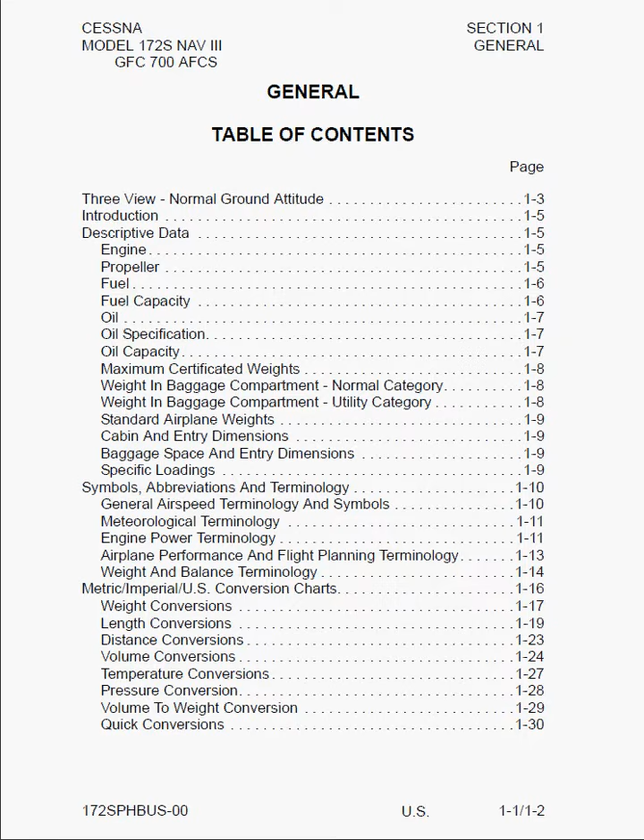Next we've got the 3-view drawing of the aircraft and some important footnotes on items like the wing area, ground clearance of the propeller, wheelbase, etc.

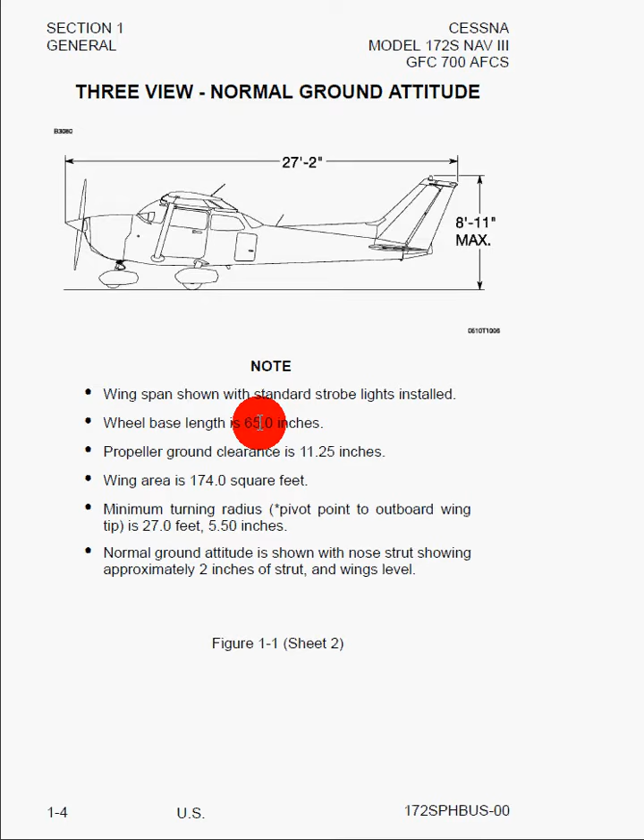Here we've got the introduction, which basically gives an overview that the POH is going to contain 9 sections, and that Section 1 is going to have definitions, explanation of symbols, abbreviations, and terminology that will be commonly used throughout the rest of this Pilot's Operating Handbook.

We can start with the engine, and it tells us that we've got obviously one engine. It's an IO 360 L2A, and it's 360 cubic inches, hence the 360. Normally aspirated, direct drive, which means the propeller bolts right onto the drive shaft of the engine. It's air-cooled, which is why we have those air intakes on the front cowling, horizontally opposed so that the cylinders lie flat and opposite from each other.

Fuel injected, and 4 cylinders. Horsepower rating and engine speed is 180 brake horsepower at 2,700 RPM, and that's based at sea level.

Here we have information on the propeller, and number of blades are 2, and it's fixed pitch.

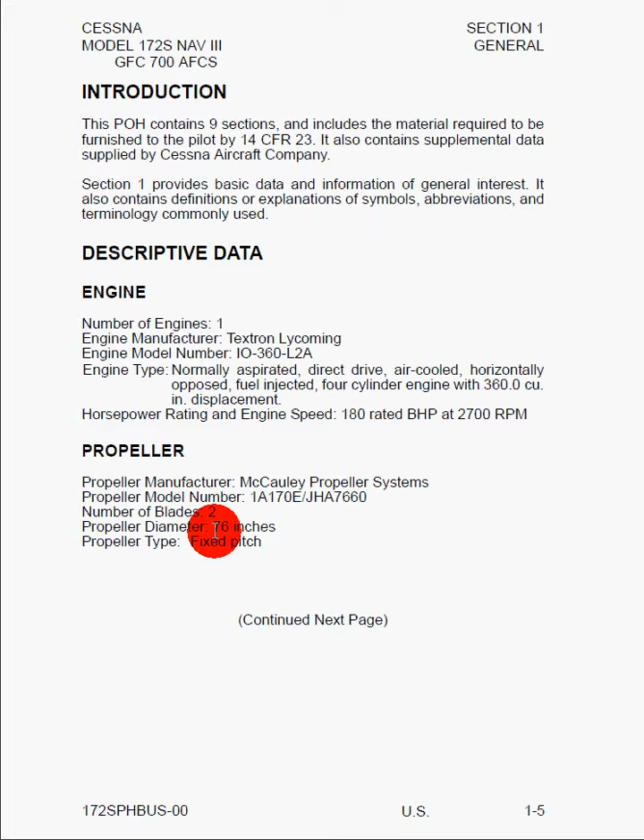Here we've got information on the fuel system, and it says use of unapproved fuels may result in damage to the engine and fuel system components, resulting in possible engine failure. So what you can use is 100 low lead, which is blue, and 100, which is green.

And then here's a little note if you want to put additives in fuel, and then also the fuel capacity, which is 56 gallons total. 53 of those are usable, and 28 per tank, 26.5 gallons per tank usable.

And a note here that when you're fueling, to get maximum fuel capacity and to minimize cross-feeding when you're refueling, always park the airplane wings level with a normal ground attitude so that the nose of the aircraft is not pointed too high or too low, and place the fuel selector valve in the left or right position, not both, and that will allow for optimal refueling of the aircraft.

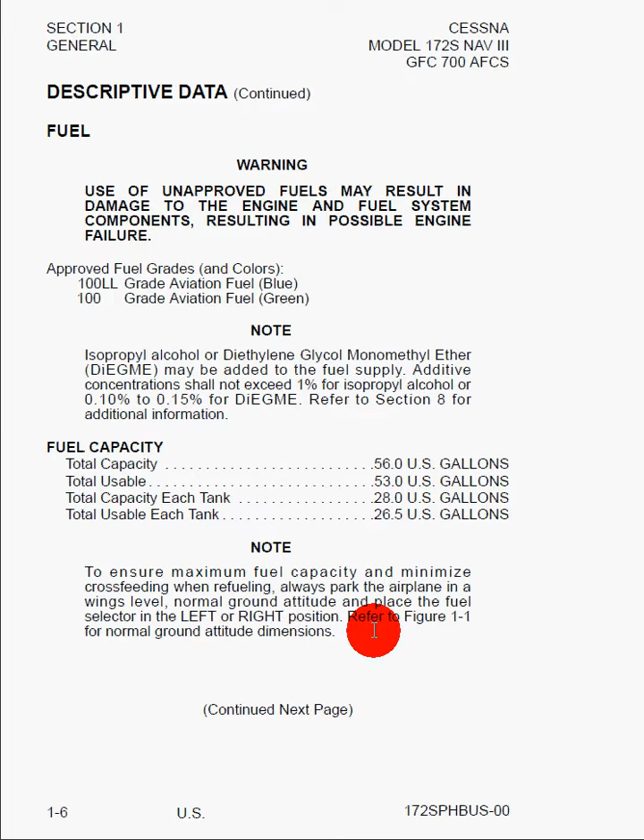Here we can see information on oil specifications, what you should do when the aircraft is first delivered for the first 25 hours. You put a different grade of oil, then you switch over to your standard oil after that. And here it tells you after 50 hours oil consumption has stabilized.

Here we have information on the viscosity for various temperatures that the engine might be operating at. Here we can see that the oil capacity at the sump is 8 US quarts, and the total is 9 US quarts.

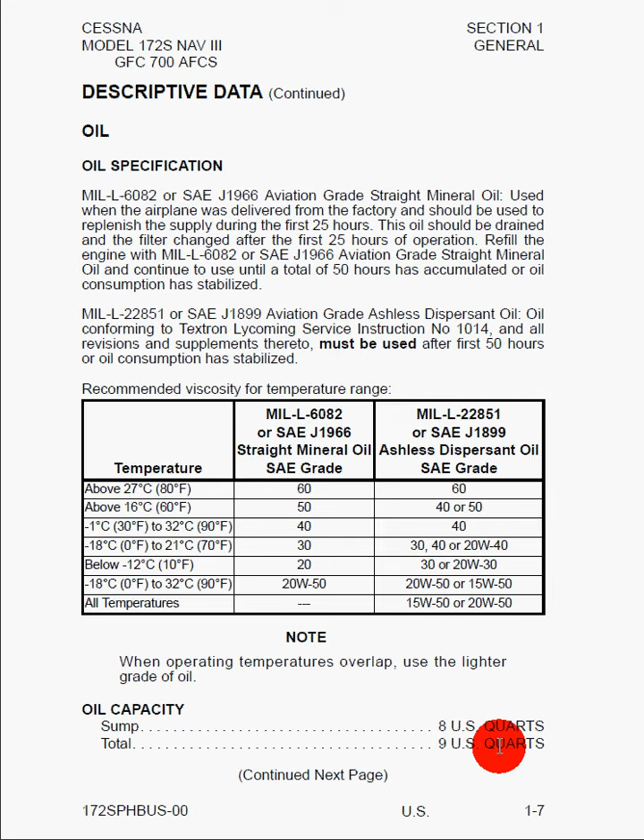If we go here, we can see the certified weights, 2,558 pounds in the normal and 2,208 in the utility category. And then it tells us our takeoff and landing weights, and you'll see that there's no difference, which basically means you can take off and land the aircraft at maximum gross weight if you wanted to.

Some airplanes, like a large airliner, can't do that, and you have to dump the fuel before you can land if you have to go around for an emergency. But for the small general aviation airplane of a Cessna 172, not an issue.

Here we can see weight in the baggage compartments, 120 for Station A and 50 pounds for Station B. However, the combined weight of Station A and Station B cannot exceed 120 pounds. And then there's a note here that says weight in baggage compartment for the utility category. In this category, the rear seat must not be occupied and the baggage compartment must be empty.

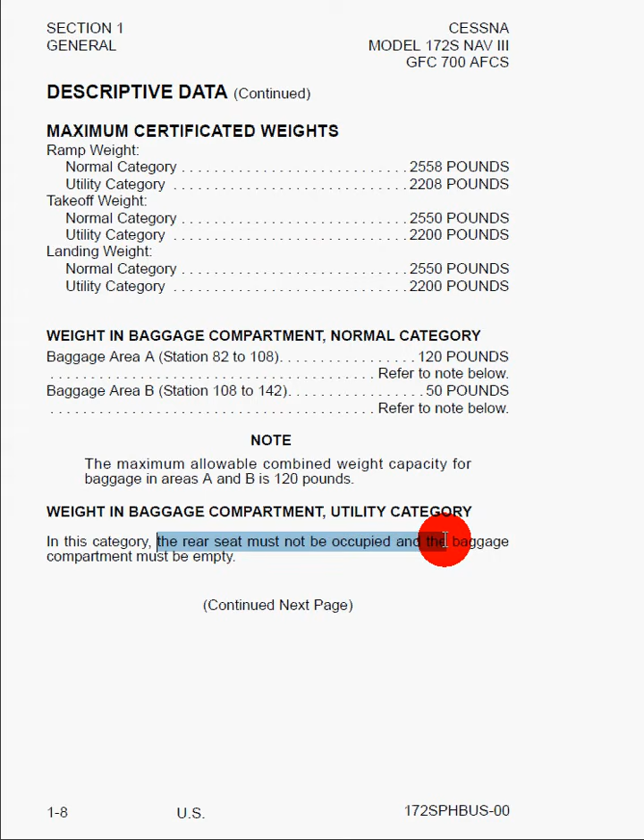Here we can see standard empty weight, which is 1,663 pounds. That means it's everything in the aircraft that's basic to the airplane, so no baggage, no people, but it does have all the installed avionics. It has the unusable fuel, the unusable oil, and all the things that would go in the airplane, like the tow bar.

So these are the things that don't change from flight to flight. The things that would change from flight to flight are the baggage, the people, and the number of gallons of fuel that you would put into the aircraft that are actually usable.

Here we can see the useful load, or how much stuff we can put in there, which is 895 pounds normal and 545 pounds utility. Here it tells us notes on the baggage space and entry dimensions, and then the wing and power loading, which is 14.7 pounds per square foot, and the power loading is 14.2 pounds per horsepower.

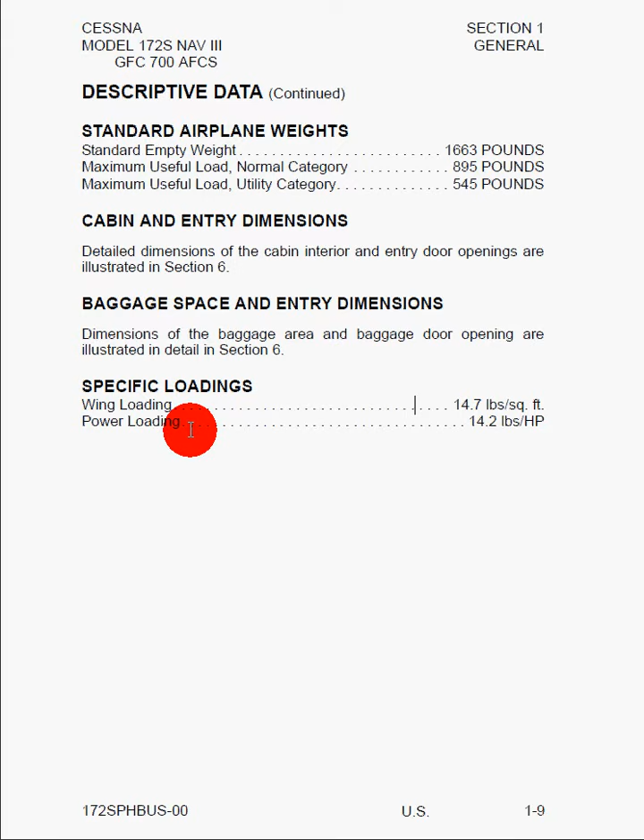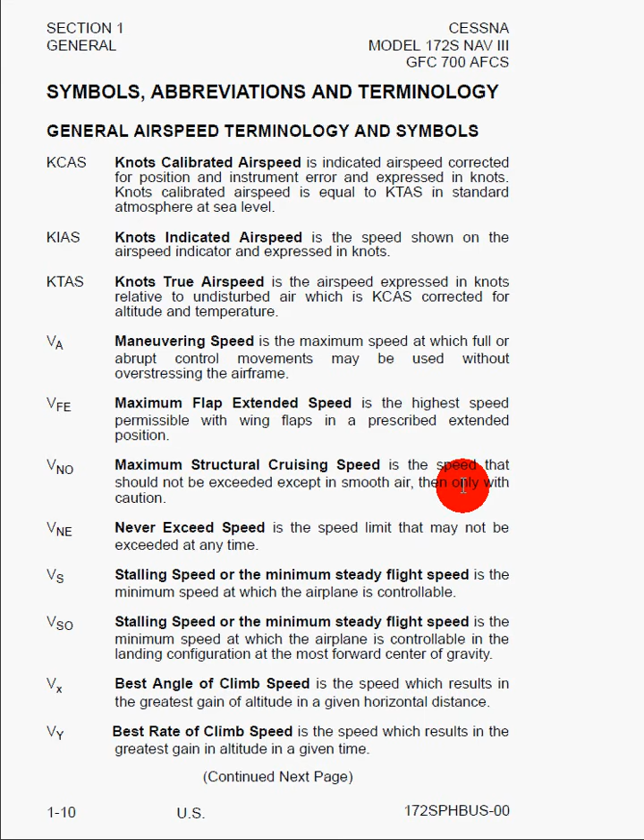Here we've got outside air temperature. This is an important one, standard temperature, because you might have a hard time finding that if you look at the performance section of the POH and wonder what standard temperature is. I can't find it anywhere, but it's defined here, and it's 15 degrees Celsius at sea level pressure altitude, decreasing 2 degrees Celsius for each 1,000 feet. That's known as the lapse rate - it lapses 2 degrees per 1,000 feet.

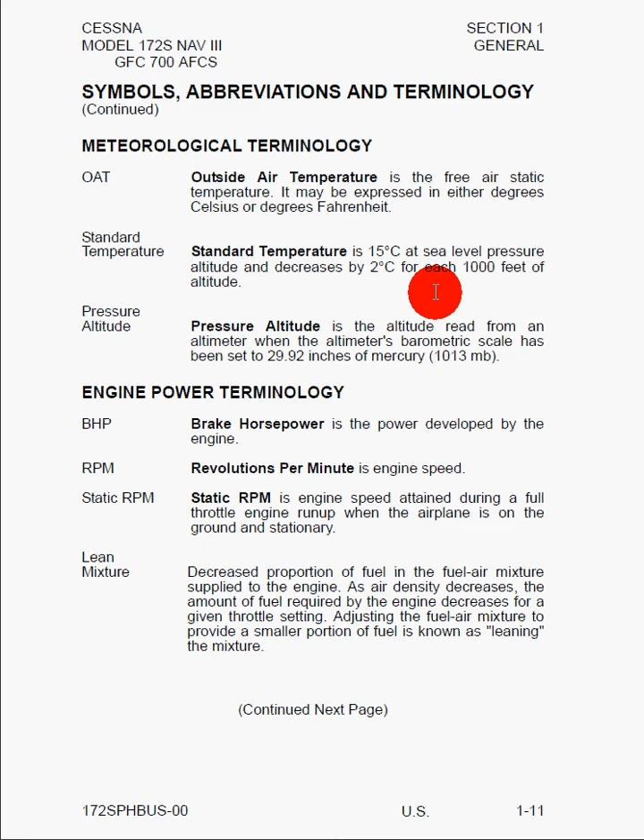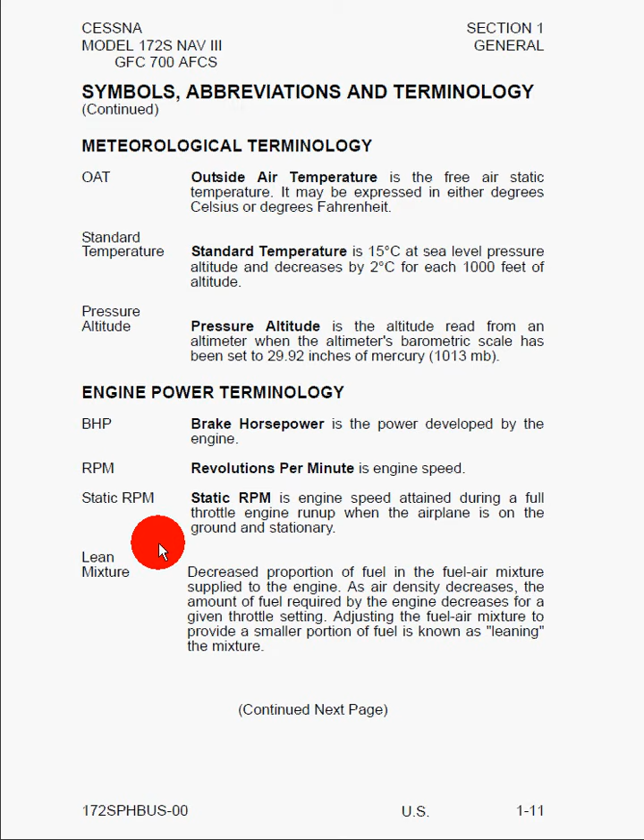And here the pressure altitude, which is 29.92 for standard conditions. Here we've got information on engine power terminology - closed throttle, full throttle, etc. Here we've got information for performance and flight planning, usable fuel, and unusable fuel, which I talked about earlier, gallons per hour, etc.

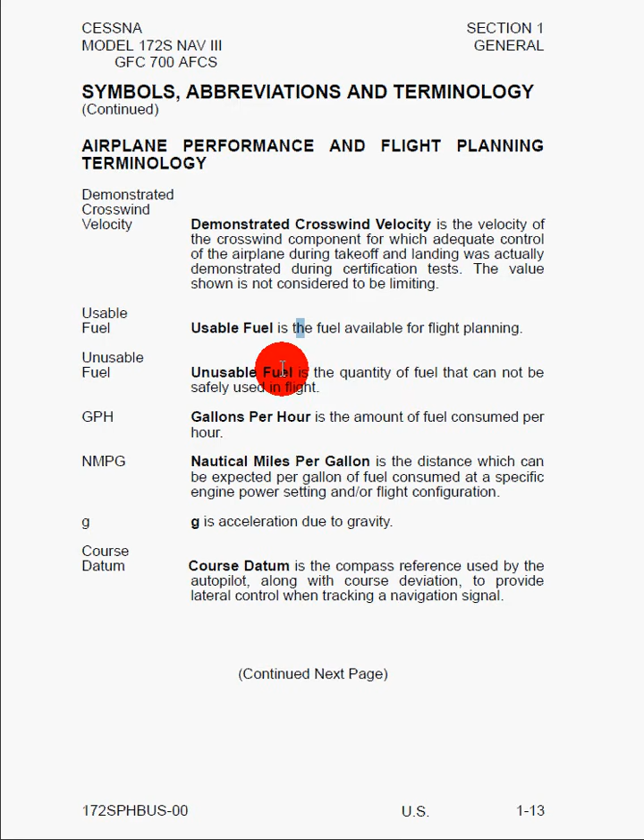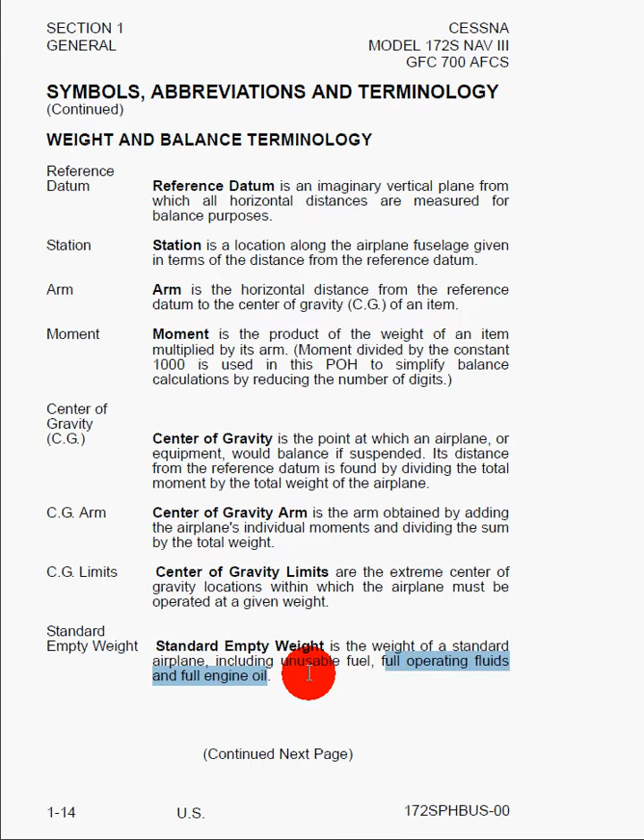Here we've got weight and balance terminology. Standard empty weight is the weight of a standard airplane, including unusable fuel, full operating fluids and engine oil. So that's the exact precise definition of what standard empty weight was earlier. Here we've got weight and balance terminology continued.

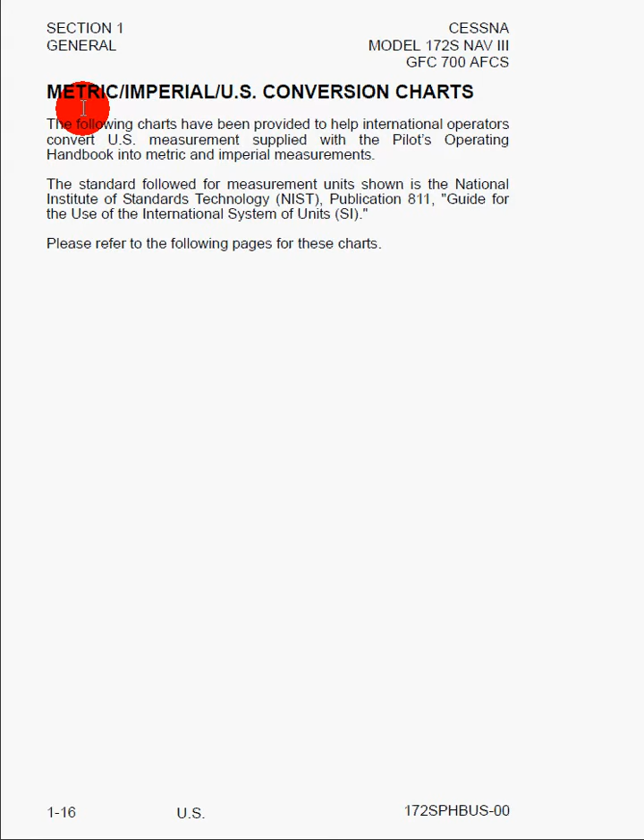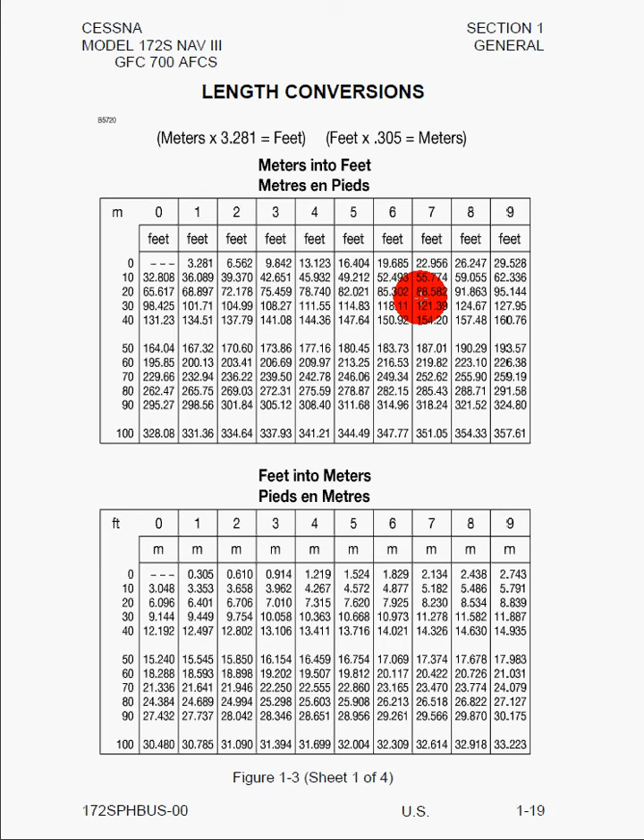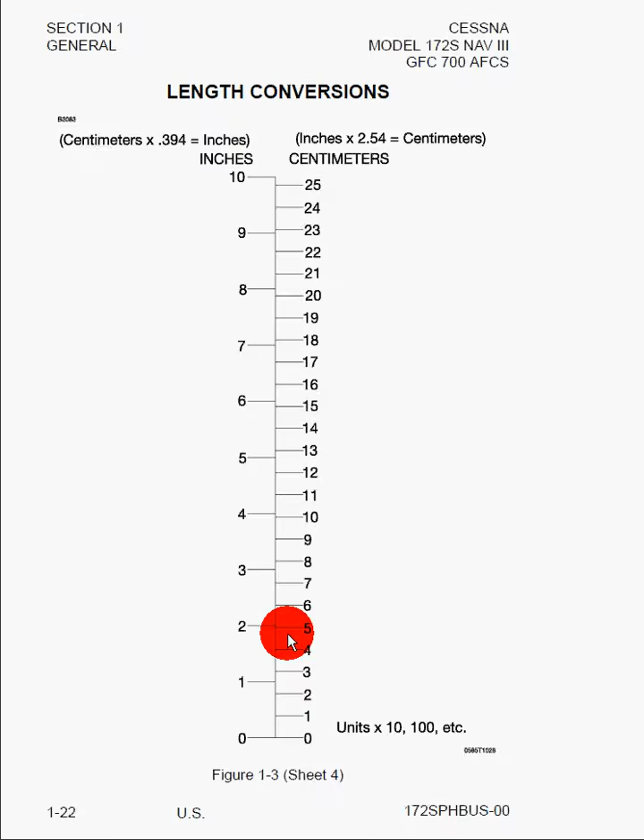Here we've got conversions information - from kilograms to pounds, pounds to kilograms, as a lookup table. Here we've got weight conversions from pounds to kilograms, length conversions from meters to feet and feet to meters, and another scale version of that. Length conversion, centimeters to inches, inches to centimeters, and another scale. Distance conversions, volume conversions, temperature conversions, pressure conversions, volume to weight conversions, and then this quick conversion chart.

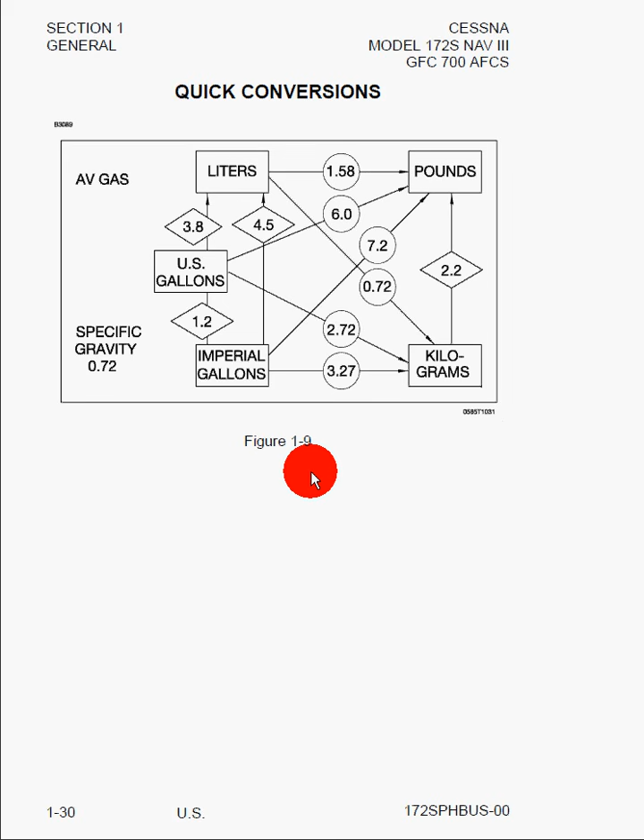And after that we go on to section 2. So that's the conclusion of section 1, and it's really that simple.